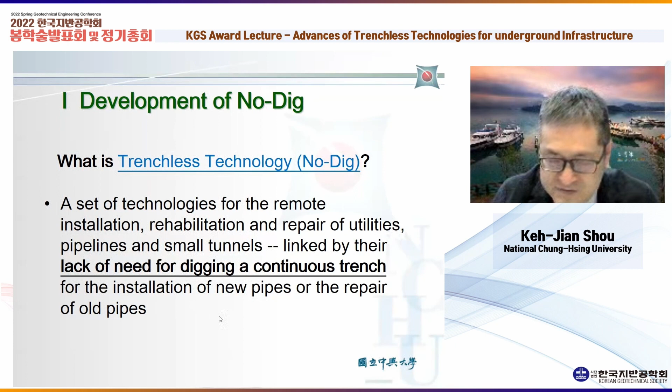This picture shows the status, and gives you some ideas about the potential impact of open cut. The potential problems can be summarized as five major problems: traffic congestion, street pavement damage, the cost of surface restoration, and also the social impact, especially the direct and indirect business losses.

In some countries, the contractors are required to compensate the businesses affected by the construction. Also, one last thing is about CO2 emissions—I think some countries also require the contractors to pay the so-called CO2 tax. You have to pay.

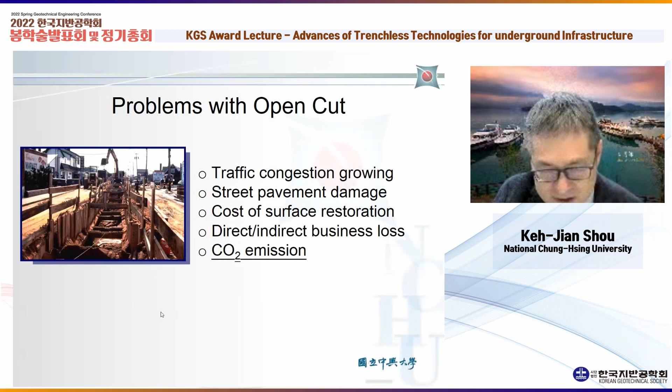You can see the impact to traffic is significant. But for trenchless technology, the only excavation we have to do is to excavate the launch shaft and the arrival shaft.

So you can see the impact to the traffic is significantly reduced.

According to the ISTT, International Society for Trenchless Technology, the method can be categorized into three different types, classified into three categories: inspection, new installation, and rehabilitation.

Due to the development of new technologies, especially sensing technology, inspection is becoming more and more advanced. We have options for better application. For new installation, these methods are more familiar for us geotechnical engineers, including directional drilling, pipe jacking, microtunneling, etc.

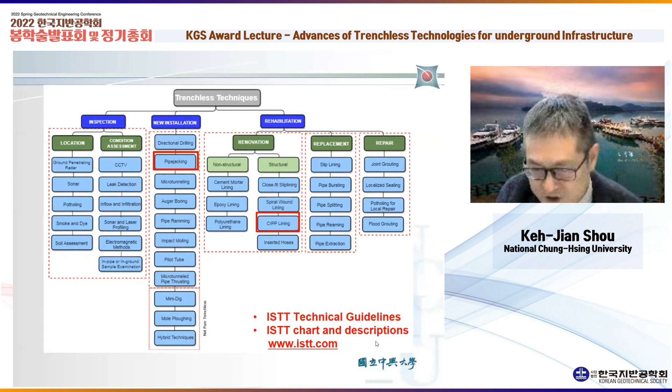If you want to understand the details, you can check www.istt.com for more information. Also, we develop new charts and descriptions so you can have more ideas about these technologies.

For inspection, I think maybe 10 years ago we only knew CCTV could be used to inspect the condition of existing aged pipelines. But you can see more and more methods are being implemented or integrated for better detection. We can detect leaking and the location of leaking. Also, we can monitor gas, the flow condition, and even for viruses, we could use biosensors to detect COVID-19 condition.

For new installation, I think the most commonly used method could be HDD, horizontal directional drilling. We use the machine to drill a pilot hole, and we use the reamer to enlarge the hole before we pull the final pipe string into the hole.

For this technology, the size can be bigger and bigger, so the diameter can be up to around 1,400 millimeters. The world record length of HDD is 5.2 kilometers. This case is in Hong Kong - it's a gas pipeline under the sea from the New Territories to the Hong Kong airport.

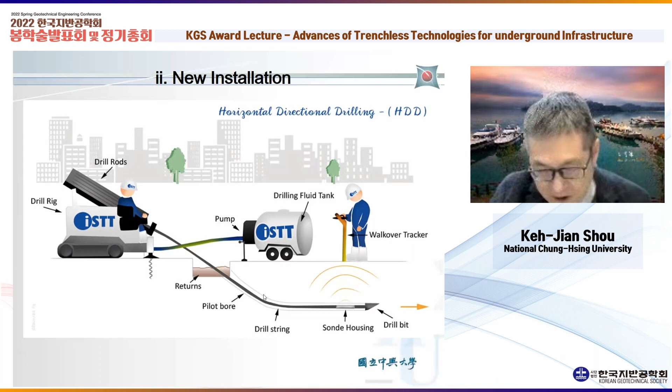You can see HDD is more and more developed and competes with pipe jacking, and can somehow replace some projects that commonly use pipe jacking.

Microtunneling - you can see we have a semi-shield machine. We can dig a hole, and the pipe string is behind the pipe jacking machine, and the jacking system is inside the shaft and behind the pipe string.

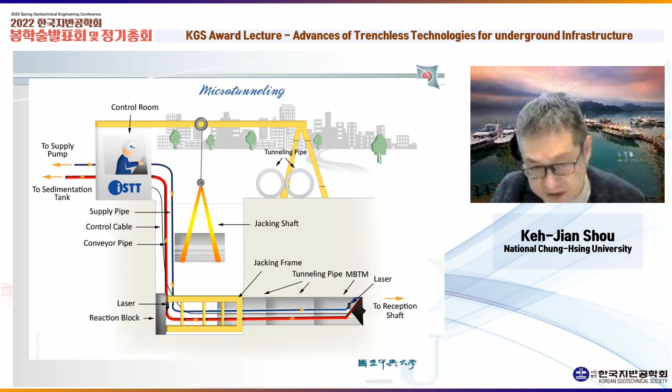This pipe jacking technology is commonly used in different fields, and the world record for the length is up to about 1.2 kilometers. It's a project in Ohio, US, with a diameter of 1,500 millimeters.

For rehab, it is used to restore the integrity of the damaged pipeline and extend its operational life. As I said, there are three subcategories: renovation, replacement, and repair. Repair is commonly used to fix the problem in a local damaged area. For replacement, we destroy the old pipe and replace it with a new pipe. And for renovation, we try to integrate or properly incorporate, and maybe we could use some of the performance of each pipe.

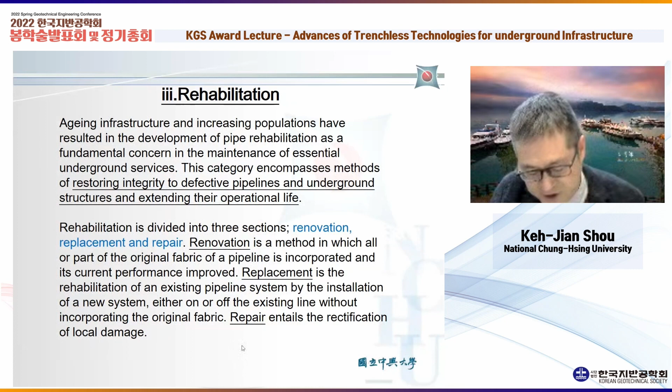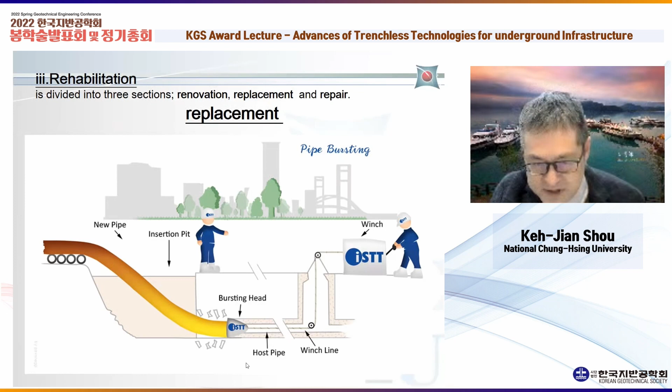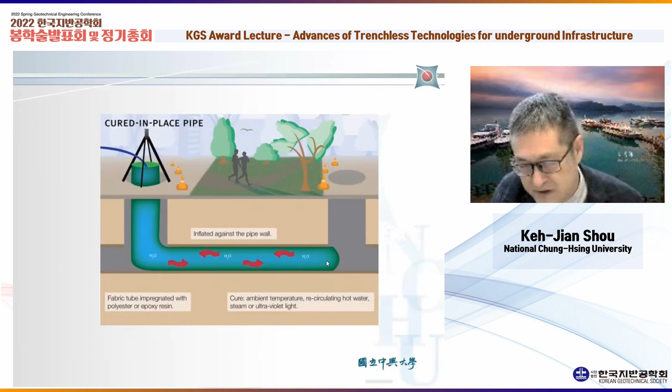CIPP could be the most commonly used rehab method in the world. We place the inversely folded liner into the old pipe, and we cure the pipe by heat or light to cure the liner, and it becomes the new pipe with structural performance.

For trenchless technology, these methods are more and more commonly used in different fields. For example, for offshore wind turbine fields, you can see we install power cables. However, we have to install the receiving facility onshore, so this cable must be placed on the ground. So HDD is commonly used - it's a very demanding method in the world now.

Also for pipeline inspection and rehab, that's very demanding now. And also new methods are more and more commonly developed by integrating different methods.

For example, we have a microtunneling machine, but we add a pipe thruster to provide more thrusting force, more jacking force provided by the thruster. And also this is what we call assisted ramming boring - when we use pipe jacking, we could use a rammer to provide pneumatic ramming force, making it a combination of jacking force and ramming force. So this is also a hybrid method. We call it a hybrid method.

Okay, let's move on to the second part. It's about the key issues in pipe jacking.

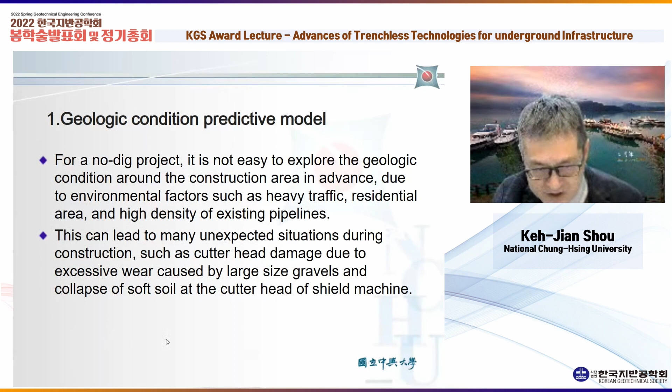If you like, you can check the details in the papers. As we know, exploration of geologic conditions before the project is sometimes difficult due to traffic, residential areas, and other factors. However, the uncertainties of the geologic condition could induce difficulties during construction.

I'd like to use this case as an example. This case is a sewer pipeline in the Taichung Science Park. It's a 21-kilometer long sewer pipeline, and the formation along this alignment is a gravel formation with large diameter gravel. So this large diameter gravel caused a lot of problems.

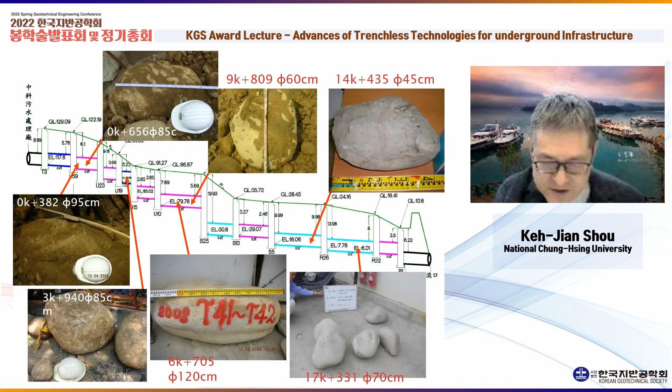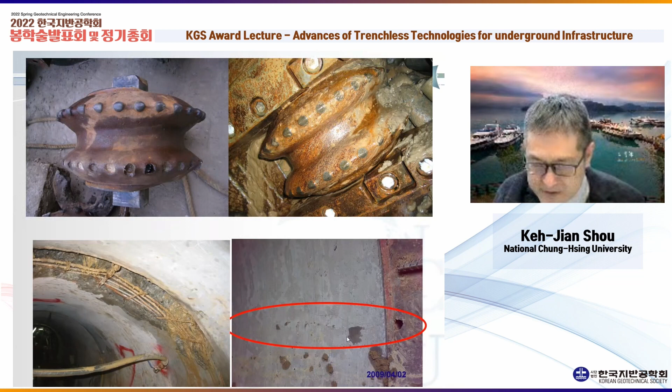These gravels are composed of quartzite. It's very hard and aggressive for the cutter head and also the drilling machine. You can see the excessive abrasion for this cutter, and also, due to collapse in the annular space, the gravel caused damage to the concrete pipeline, and also the concrete pipe damage to the connectors.

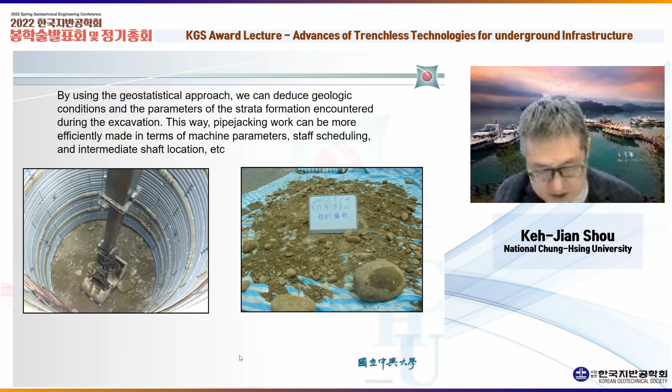So what we are trying to do is collect samples from the shaft and do some sieving tests to understand the size distribution and the probability of the large size gravel we could encounter during the driving operation. This picture shows the sieving test we did in the field.

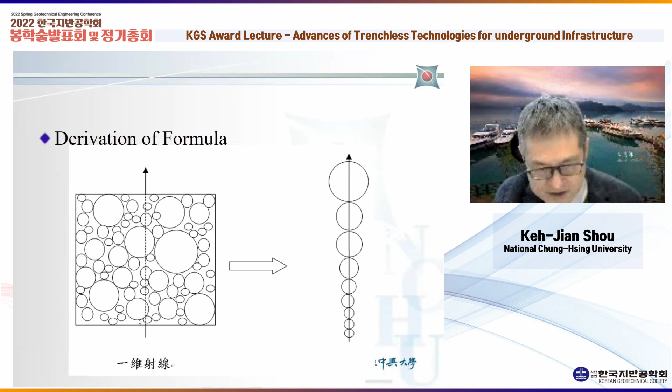And also we did some analysis of geometry to calibrate the sizes. You can see that this is the penetration of the soil mass, and the penetration length of the large particle actually is smaller than its diameter. So we did some analysis and found that we should adjust to about 93% of the sizes.

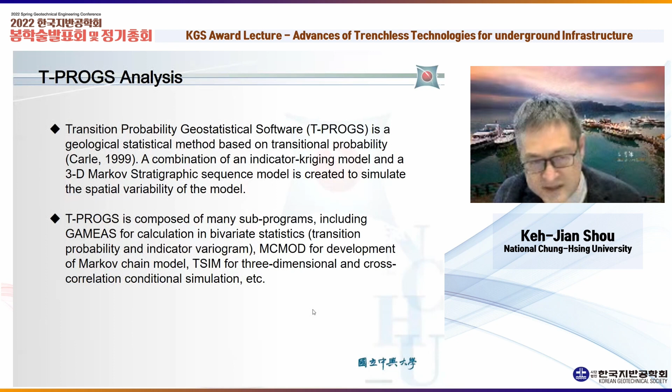The model we applied is called a transitional probability statistical model. We used T-PROGS as the commercial software, and the theoretical basis behind this is the so-called transitional probability.

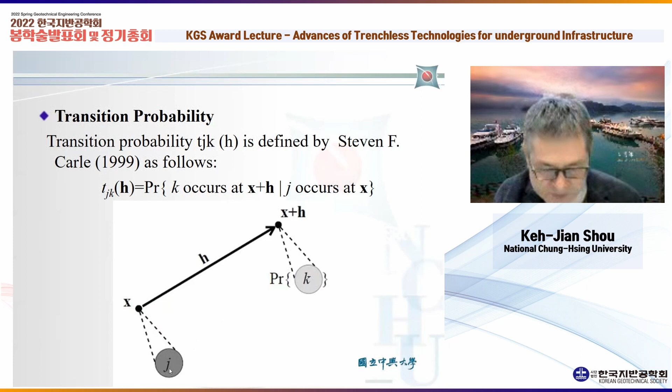Transitional probability means that the event occurred at location X plus H is actually based on the probability of the event occurring at location X. So this is a spatial correlation of the probability of the event.

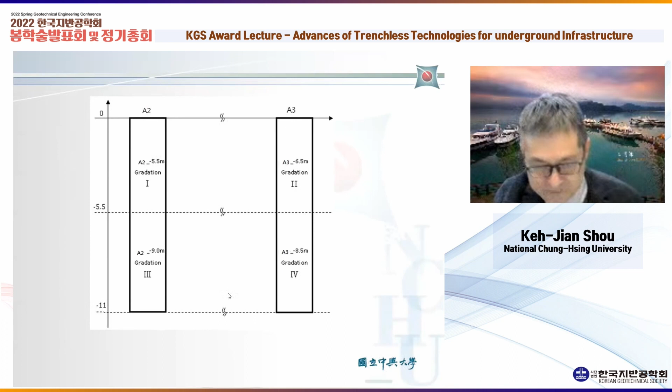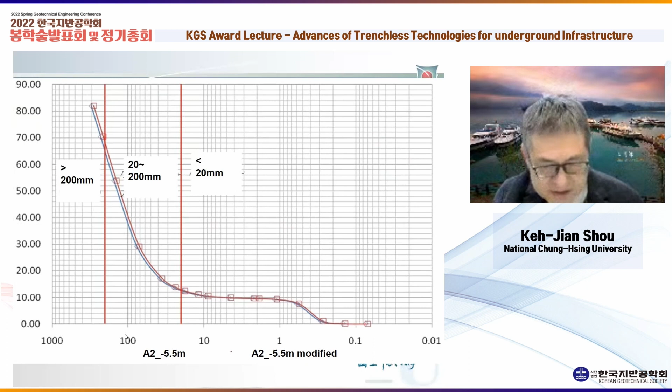This illustration shows the samples we collected from the launch shaft and arrival shaft at different depths. We obtained the gradation curve, and then we divided the gradation into 3 different ranges: below 20 millimeters, between 20 to 200 millimeters, and larger than 200 millimeters.

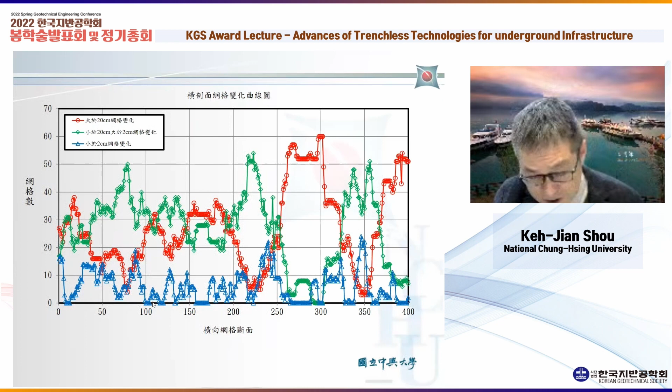So we assigned the size in different regions with different colors. This is the model we obtained by using the software. Different colors represent different sizes. So then we can obtain the size distribution along the alignment or at specific cross sections.

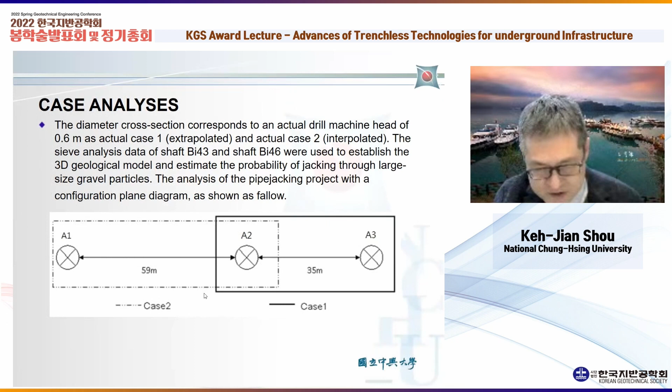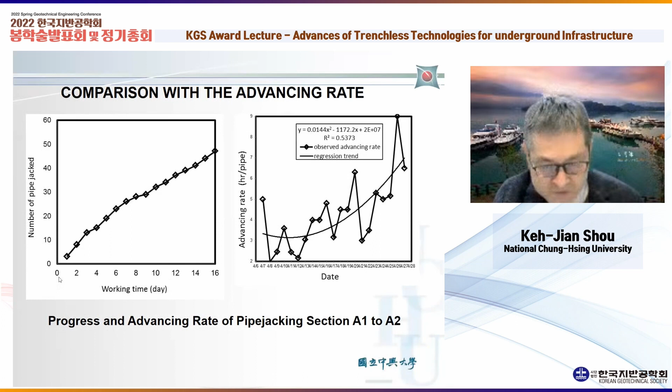And we tried to use the case to calibrate our model and then do some prediction to see whether this model is applicable or not. So this is the advancing rate. We tried to correlate the size distribution along the alignment with the advancing rate of the pipe operation.

So this is the size distribution along the alignment. This is the advancing rate in section A1 to A2. Short summary: these T-PROGS are used to do the prediction of the geologic condition, and the trend in material change and the advancing rate have a reasonably good correlation.

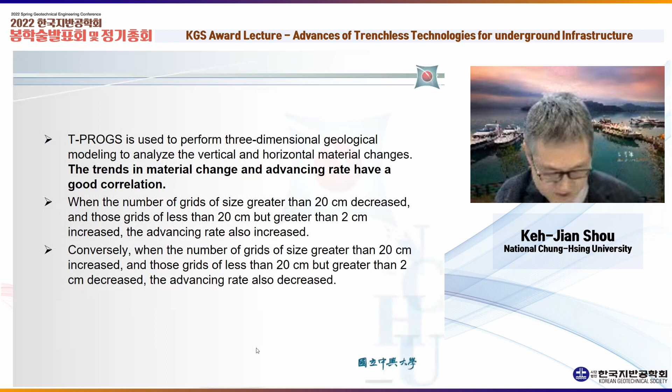However, more detailed analysis is suggested. Nonetheless, this study provides a new way to do the prediction for the geologic condition.

Then for the second topic, it's about the behavior of overcut and sticking. As we know, overcut is commonly used to reduce the resistance of friction during the operation. However, improper overcut could induce collapse, subsidence on the surface and also a sticking condition.

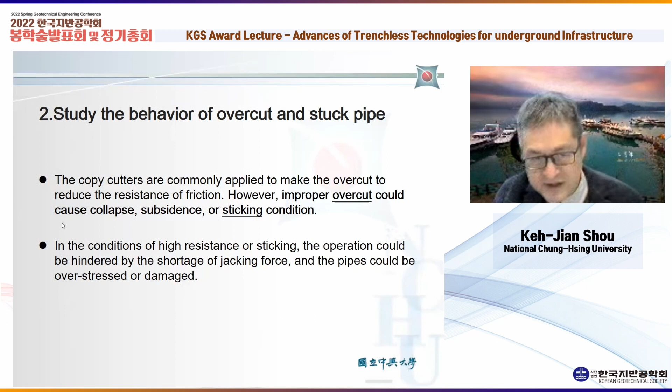In this study, the numerical method was used, and the conditions and numerical properties in the Taichung area were used for the analysis. These figures show the meshes we used for the analysis.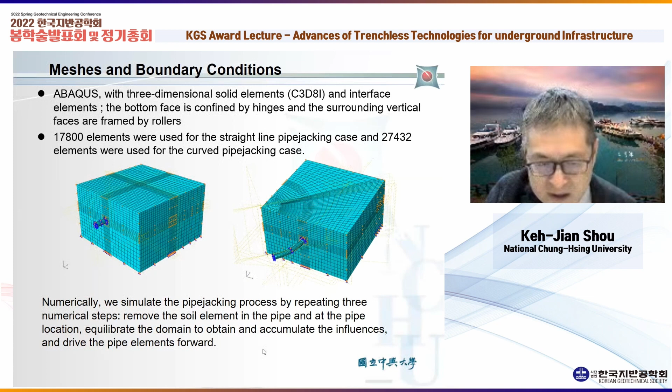And the pipe jacking is simulated by numerical steps: remove the soil, push the pipe to the specific location, and then we equilibrate the domain to obtain the new condition of stresses and displacement.

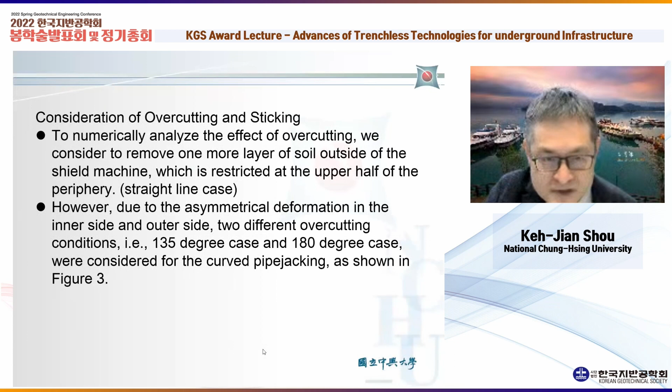Okay, so for the overcut and the sticking, I would like to use this figure to show you. For the straight line pipe jacking, we consider the overcut on the upper half of the peripheral area, and then the sticking is at this location.

And for the curved pipe jacking, there are two conditions of overcut: it's 135 degree of overcut or 180 degree of overcut. Because this curved pipe jacking is asymmetric.

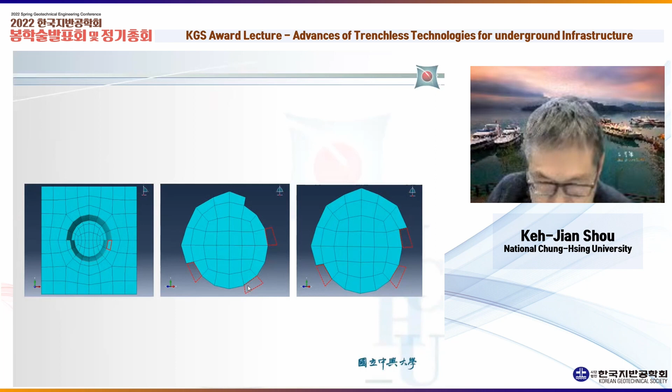And for the sticking, there are different scenarios. Could be the inner side of a curved pipe jacking, or could be outer side of the curve, and also could be on the upper part, or could be in the lower part. So different conditions, different scenarios.

And for the sticking, two types of sticking: with high resistance, so friction coefficient up to 0.523, and the second condition is totally stop, where the friction coefficient is up to infinity. So we consider the different types of sticking.

And the results show that the stress state are quite different at the inner side and outer side of the pipe. Also for the sticking with high resistance, the stresses at the inner side are higher than that at the outer side.

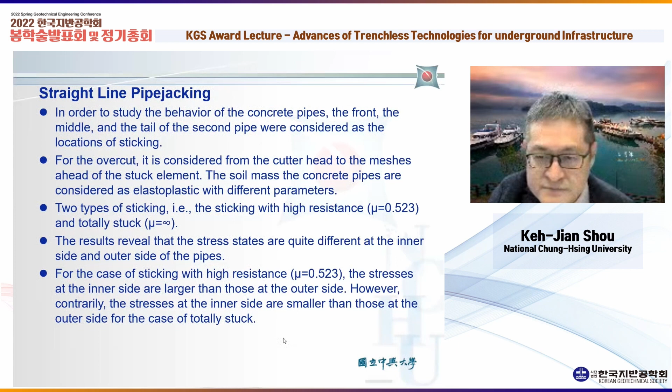You can see the comparison between the case with different friction coefficient, 0.523 and to the infinity, it's quite different, and also inner side and outer side are quite different. So this is the Mises stress distribution along the inner side, outer side of the cross section.

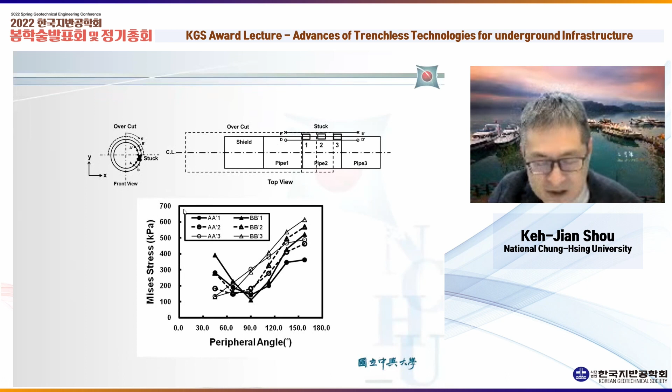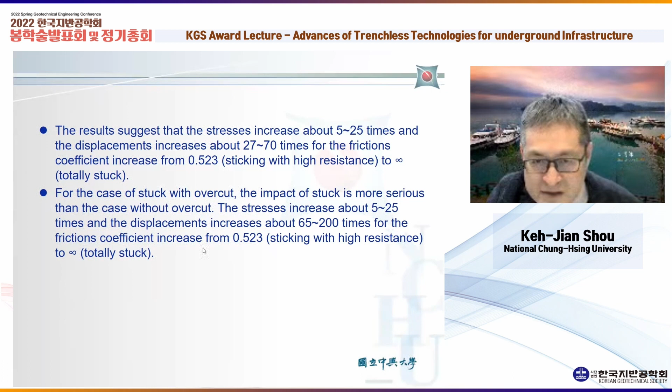Okay, so the results suggest that the stresses increase as the friction coefficient increases, and in the case of overcut, the impact is more serious.

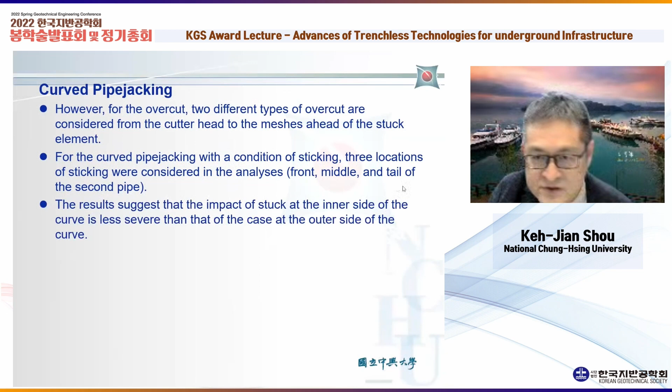For the curved pipe jacking case, we consider the scenario in a similar way. However, we consider the sticking at 3 different locations: front, middle, and tail, and also upper and lower, and also inner side and outer side of the curve.

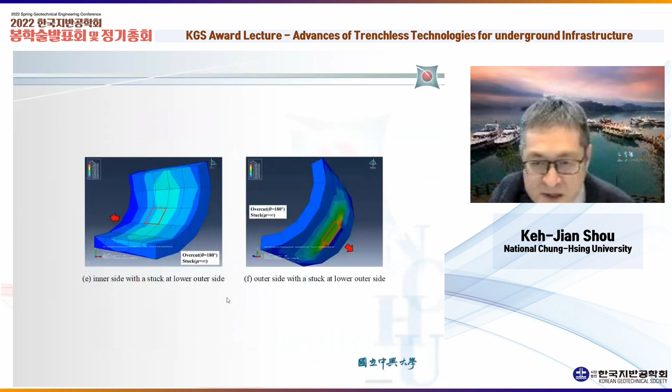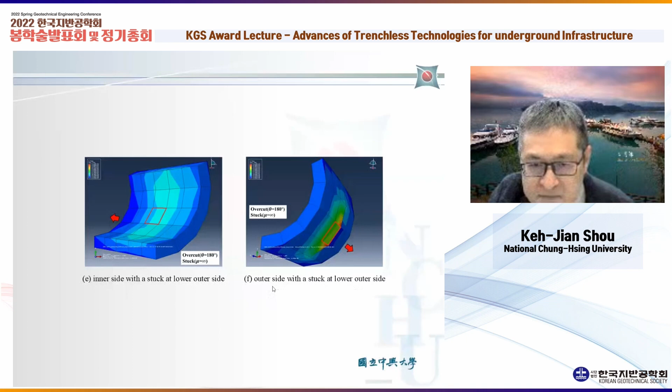Okay, so this is the comparison with the stuck at a different location, stuck at the lower outer side, but showing the inner side and outer side of the concrete pipe. So this is the distribution.

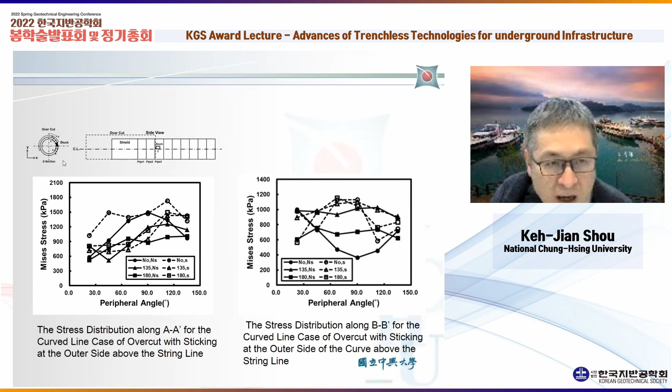I think this is a comparison between stuck at the upper half space, outer side with overcut, but stuck at the outer side of the curve. So you see the behavior is kind of complicated, but it's quite different.

Again, in summary, proper overcut can help to reduce resistance during pipe jacking. However, we must be careful: in case of sticking, stress at the section with overcut are much higher than those without the overcut. In other words, the impact of overcut is more serious for that case.

The results also suggest that backfill could be a solution to avoid this condition, because backfill can prevent the collapse and can prevent the sticking.

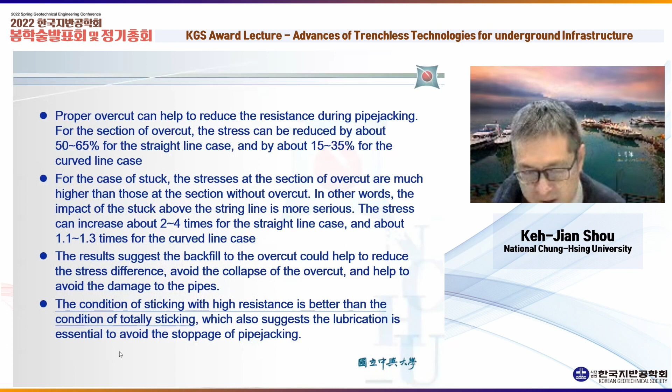Also by the comparison, we can see that the case for the friction coefficient of 0.523 is better than the case with friction coefficient to the infinity. This finding also suggests that lubrication is essential, could be very helpful to avoid the stoppage of the pipe jacking, and also helpful to avoid the shortage of pipe jacking force.

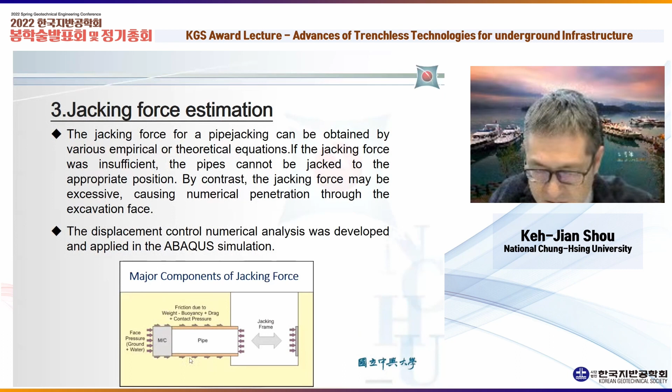Okay, for the jacking force estimation, as we know, we have different empirical formulas that can help us to estimate the jacking force. The jacking force is mainly composed of two major components: one is the resistance at the cutter head, and the second part is the resistance from the surface of the jacking machine and pipe strings.

Although they have some adjustment based on different databases of real critical cases, and also some of the formulas are classified to different soil conditions, different soil types, this study tried to use a different idea, a different method to estimate the jacking force.

We call it the displacement control method, because in the numerical model we could assign a specific displacement, and then we can obtain the stress at the cross-section of the pipe. In this way, we can integrate the stresses in the cross-section to obtain the jacking force. So this idea provides an alternative to estimate the jacking force.

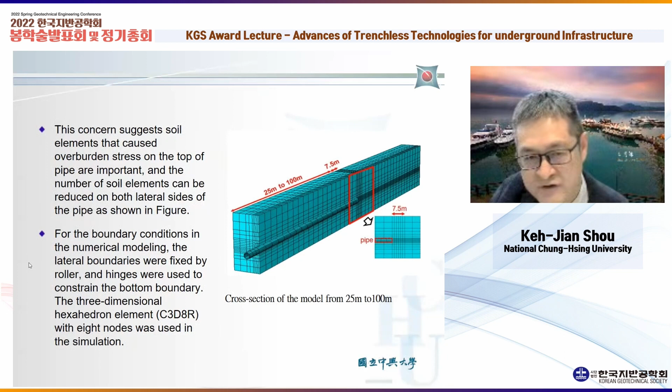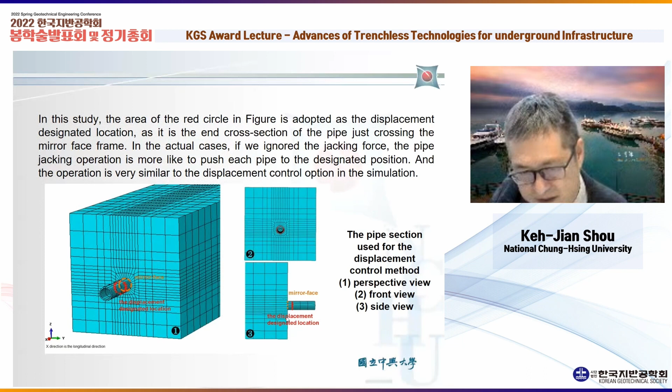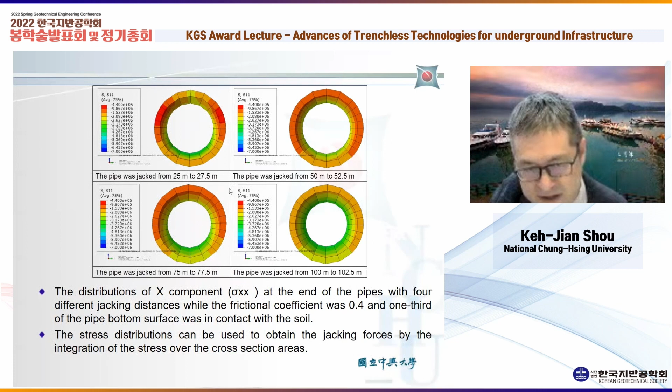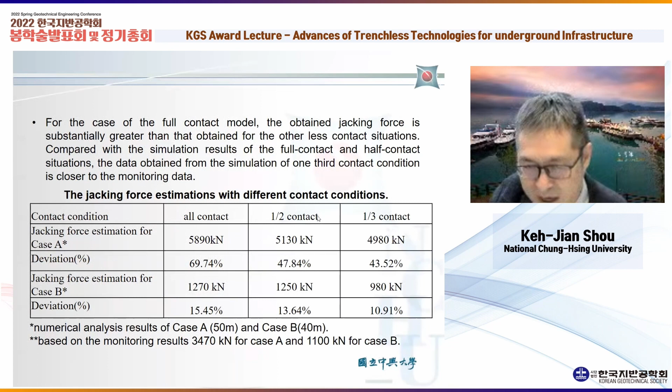So we consider two cases, the real cases, with different driving distance and different sizes, and we consider different contact conditions. As you remember, we usually have overcut, so the condition is not real full contact. We always have half or one-third of contact.

So this is the results, this is case one. You can see we did some comparison between the jacking force estimated by the empirical formula from the Japanese JMTA and from the US Staheli formula. You can see that the empirical formula always overestimates the jacking force at the final stage of the pipe jacking operation. However, our numerical method provides a better estimation, especially at the end.

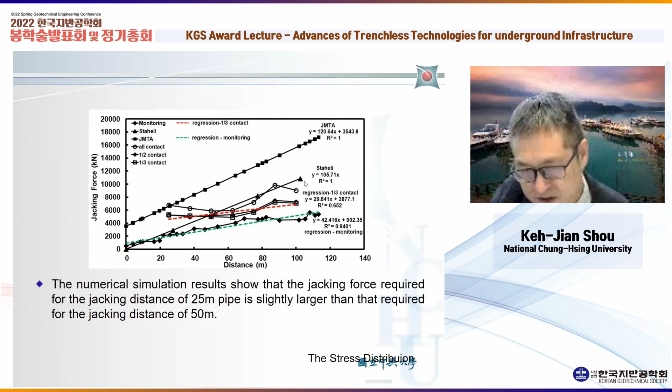For the second case, you can see the green line represents the regression of the real case, and the red line is from the numerical modeling. You can see the estimation is even closer to the real case. So this idea provides an alternative to estimate the jacking force.

So other continuing challenges for pipe jacking operation include larger diameter, longer distance, difficult geology conditions, sharply curved alignment, etc. And nowadays we could also consider the impact to the environment, such as vibration to the environment. So there are more issues that need to be investigated or studied.

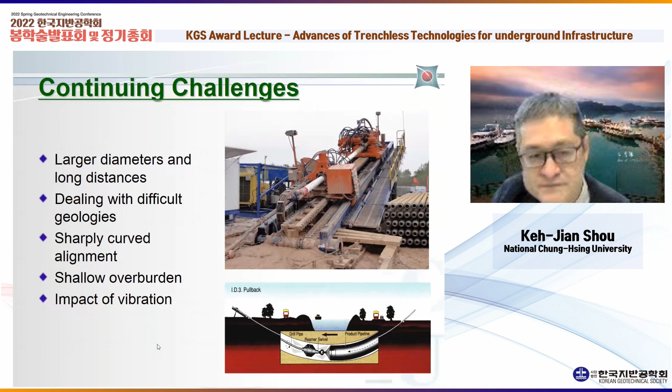For the key issues in CIPP, similarly we have two papers you could check to see the details of the presentation I give today.

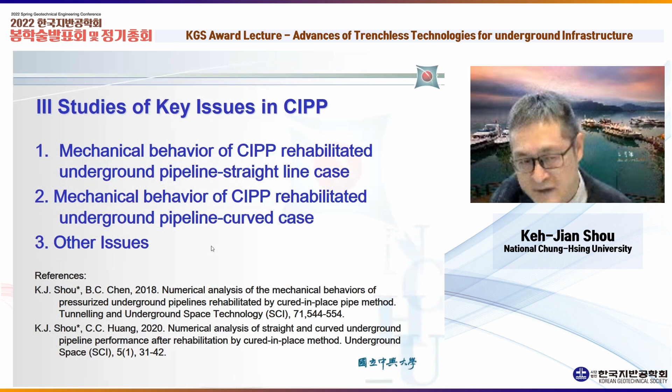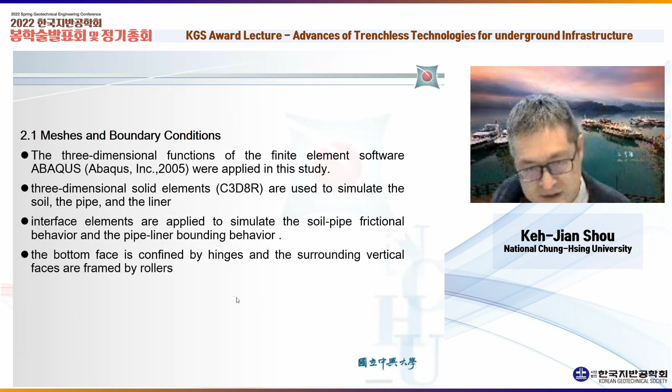Similarly, we did the analysis by Abaqus. We used C3D8R for the soil mass, for the pipe, and for the liner, and we also applied the C3D8I for the interface. These are the meshes we apply for the straight line pipe rehab by CIPP.

This is a curved pipe rehab by CIPP. This is a detailed mesh for the location where the cavity is located. You can see we consider different scenarios—we could remove the element to simulate the different scenarios of erosion.

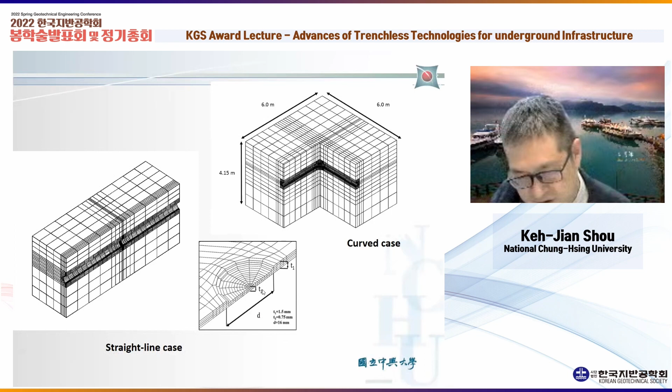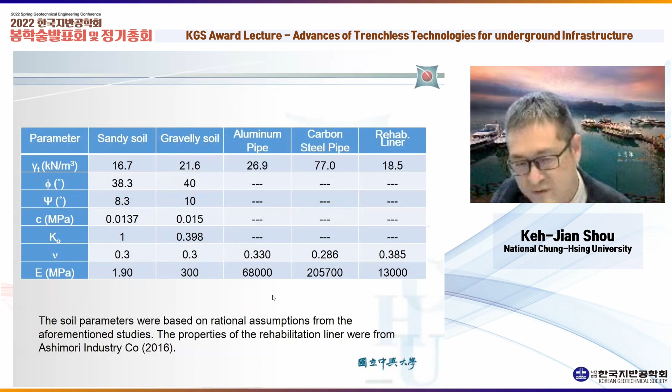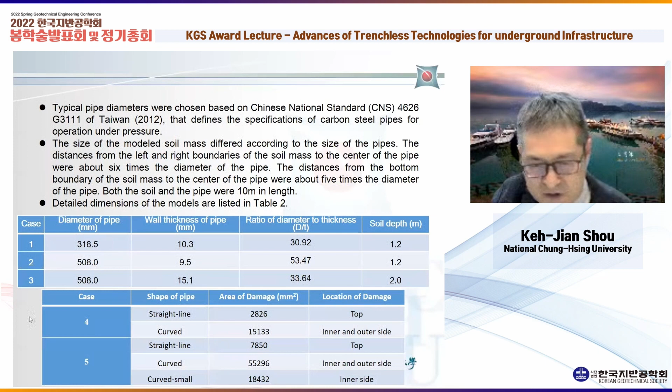The properties are collected either by lab testing or from the handbook or the standard. Before we did the parametric study, we used lab testing on an aluminum pipe with a cavity, and we used the testing results to calibrate our model before we applied it to the parametric study. We considered different diameter pipes, wall thickness of pipe, and also soil depth, and different alignments—straight line alignment and curve alignment—for our parametric study.

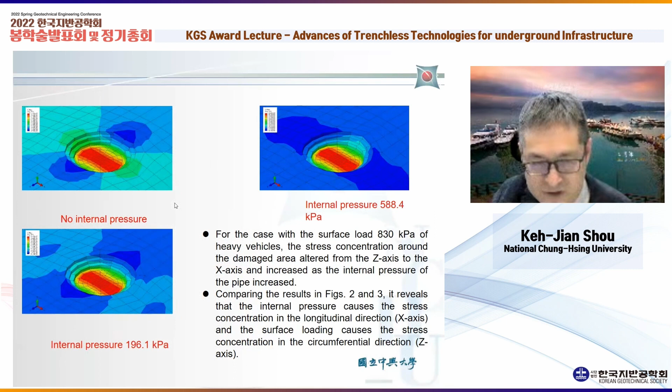These figures also show the comparison between the cases with different internal pressure. You can see this is the case with high internal pressure, and this case is without internal pressure. You can see that internal pressure is also very important for the stress distribution of the pipe with cavities.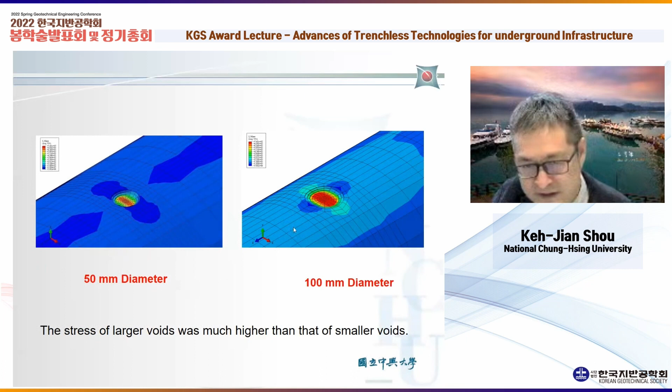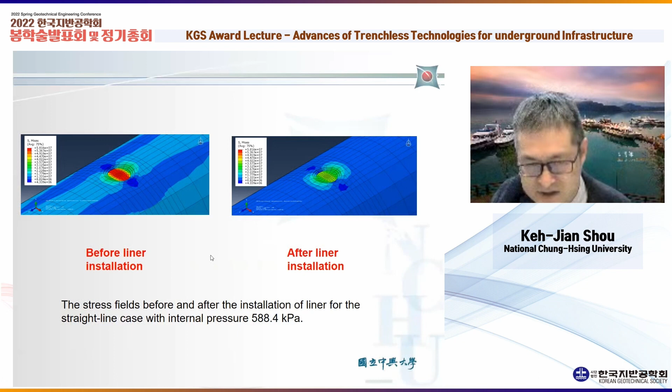These two figures show the stress distribution before and after the CIPP liner was installed. For these two cases we apply internal pressure to consider the worst scenarios. You can see the CIPP liner could significantly reduce the stress, especially at the cavity.

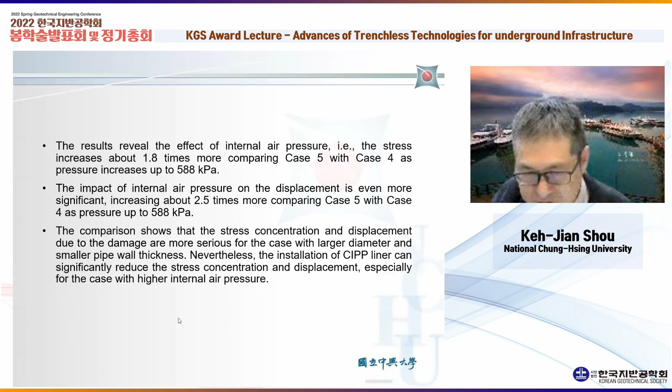Okay, the results and the comparison shows that stress concentration and displacement due to the damage are more serious for the case with large diameter, with higher internal pressure and surface loading, etc. This is the case with and without surface loading.

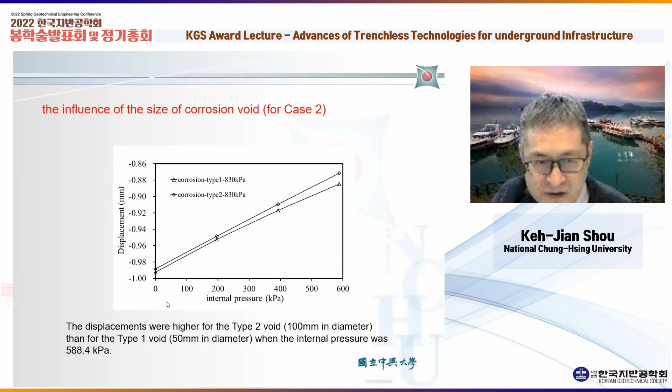Corrosion, different conditions of corrosion. Results reveal that displacement is mainly controlled by surface loading.

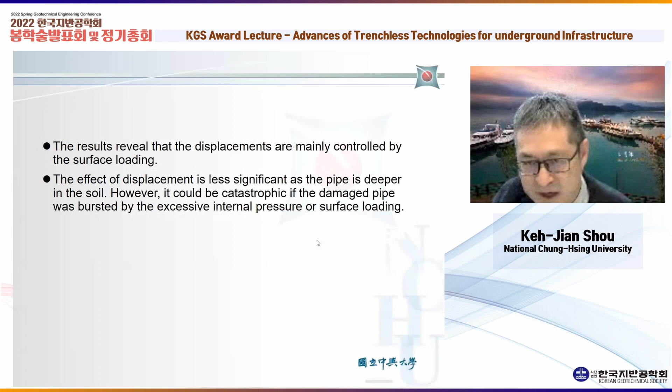Displacement is less significant as the pipe is deeper in the soil. However, displacement can be reduced slightly when the internal pressure increases. It's very interesting.

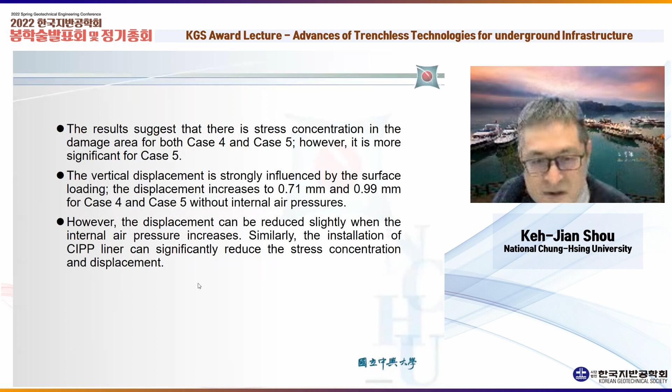However, the installation of a CIPP liner can significantly reduce the stress concentration. Okay, this is the analysis, the results of the analysis of a curve case.

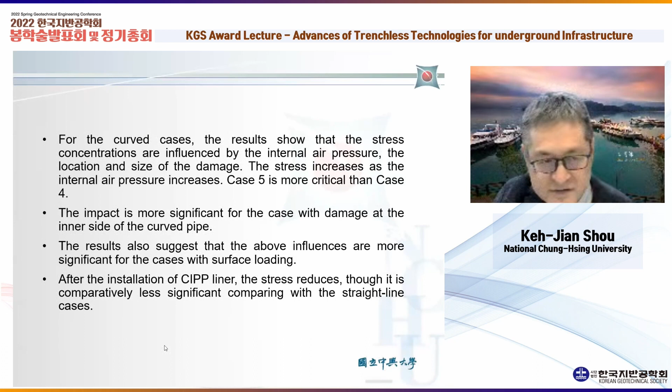Brief summary. For the curve case, results show that the stress concentration is influenced by the internal pressure. Interestingly, the impact is more significant for a case with damage at the inner side of the curve. Also, more significant for the case with surface loading.

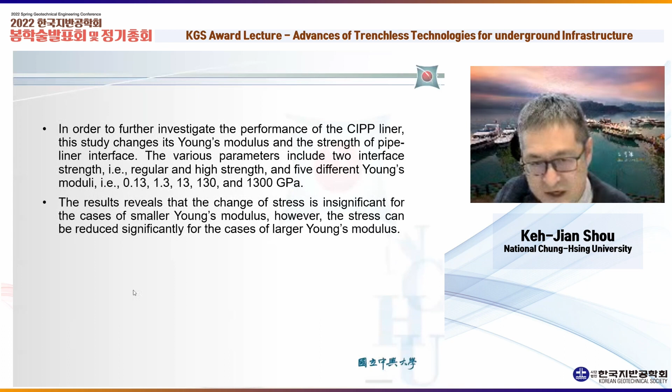Also, the results show that the change of stress is insignificant for the case of smaller Young's modulus. However, stress can be reduced if the liner has a larger Young's modulus.

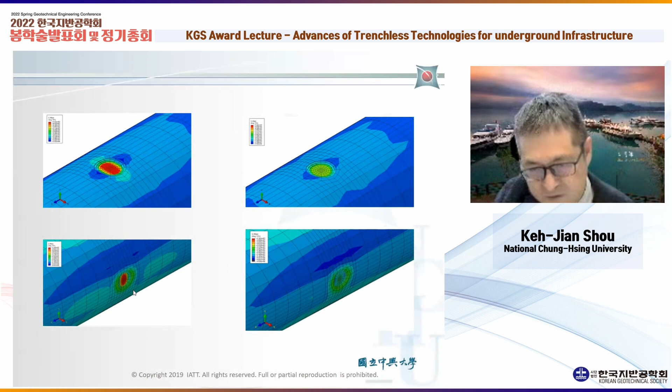This is a comparison of a case with a cavity at the top of the pipe and the side wall of the pipe. These two figures show that the CIPP liner can reduce the stresses.

However, the difference between the liner with thickness of 5 millimeters is not much different from the case with liner thickness of 10 millimeters. In other words, 5 millimeters of thickness could be enough for the rehab. This also suggests that we need to do design analysis before we assign the thickness of the liner.

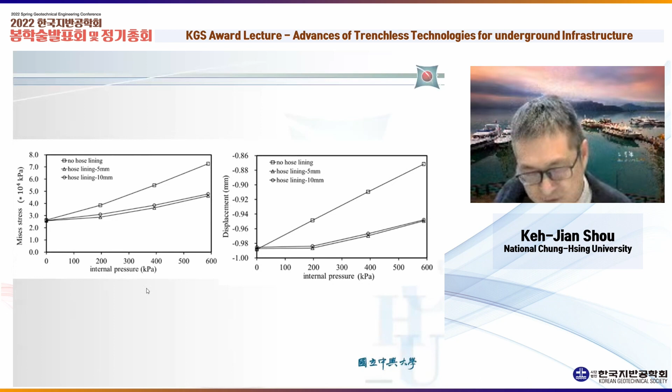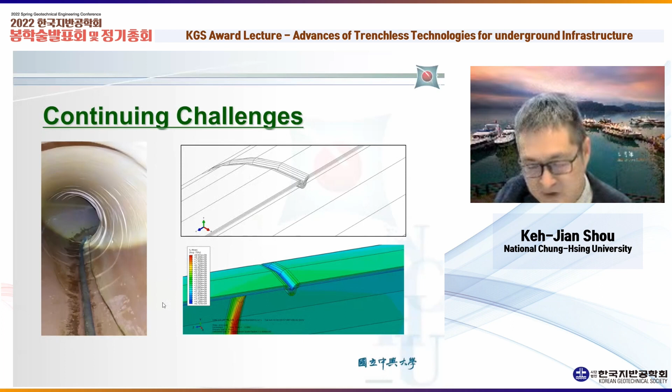Okay, so the continuing challenges. This picture shows the real situation for curve CIPP rehabilitation. You can see some wrinkles because of the curve alignment. For the case with wrinkles, the interface property, the backfill, and also the mechanical property of the liner itself could affect the performance of the rehabilitated pipeline. So more details are necessary to be investigated before we do the design or set up related standards or codes.

We did some full-scale lab testing for the case of a disengaged pipe connector rehabbed by the CIPP, and also did a parametric study with different scenarios in order to have a better idea of the control factors and the performance of the rehab for disconnected connectors.

A brief summary from the above presentation: for trenchless technologies, we have more and more development and new methods that need to be investigated in more detail, especially regarding the key issues for performance. These studies could help for better design and also for development of the code or standard.